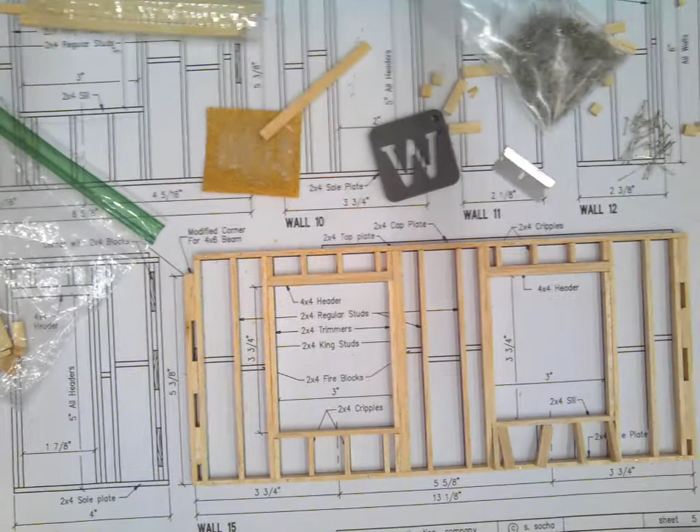All right, welcome back to another exciting build video. We are working on the scale model house project from Midwest Industries. It is really moving right along here. We are on wall 15, sheet 5. Sheet 6 is the last sheet of walls before we start working on the roof itself. This is just really exciting.

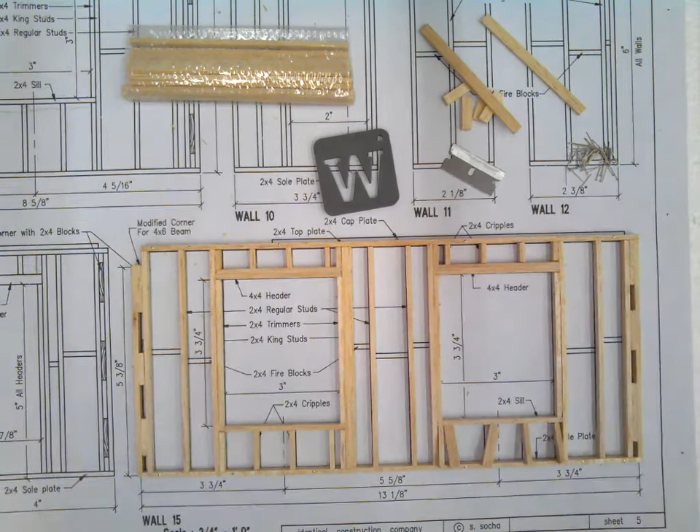So let's see what we can get accomplished today. Now I'm looking down here and it's really... there, that's better. That's getting you more in the sweet spot, center of your screen.

Now this is really interesting how this has come together. We had two identical pieces here. And what I want to say here is this might be wrong. Okay, I'm really looking into this. What I normally have seen is this trimmer go all the way down, and then I'm trying to get some confirmation on that. My friend's working on a build out that has a window, and so I asked for some pictures of the stud structure for the window, so hopefully that will help answer the question. This piece, this trimmer might need to be continuous. So just so we're aware, there are some anomalies in this, but I would say it's over 90% correct of what we would see in real life.

So let's go on to this next part here. We're going to be getting these cripples in underneath the sill. A lot of sanding for us today, but we'll be finished with sheet 5 today. That's the exciting part about this. There we go, that's nice. Get in there.

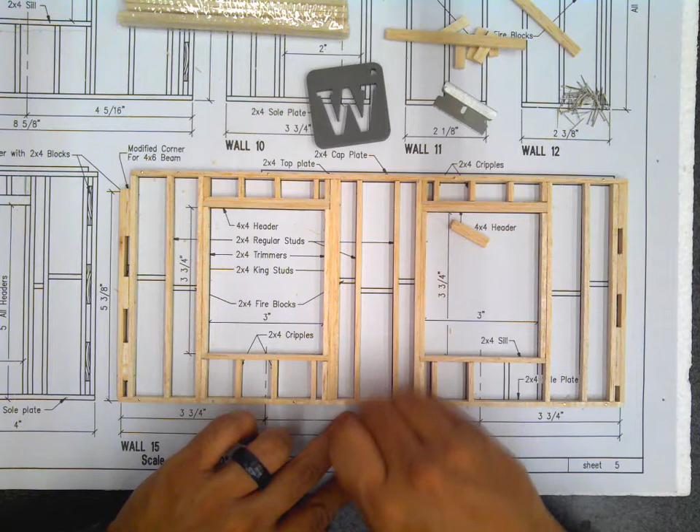Remember, you want it snug, but not too tight. Wow, this is great, okay.

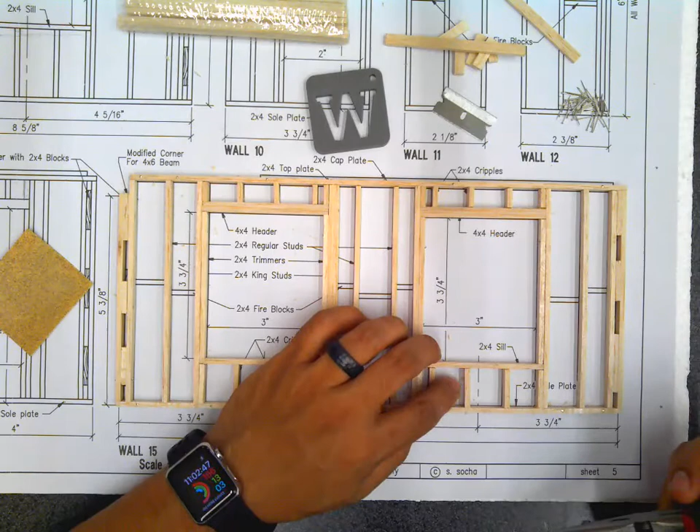Okay, let's get the nails. It is really easy to grab them off of the foam, so maybe I've been doing it wrong the whole time. I'm always trying to improve my process, not because I think it's necessary to do everything as fast as possible. I think it's important to reflect on what you're doing, do things that are intentional in the building process. If you want to get better at your craft, you have to take your time and think about everything in advance.

For instance, I'm thinking about the tiny home project that I mentioned earlier today. The interesting part about that is it could take a few weeks to get everything ready for the space. Just getting the space organized, that takes a while. And I went and had a meeting this morning with the head custodian, so I could try to wrap my mind around what work orders needed to happen so we could get this project started.

Wow, that's great, I'm really happy with that. Okay, so let's see what else we have here. I think we have some top plate, we have a cap plate that's ready to go on. So I'm going to make sure all my nails are in, I'm just going and following up on all of these. Yeah, they're all in now, that's great.

Okay, so this piece is longer than my normal 8-foot stud, so we're going to have to use one of our longer pieces. So let's go to our longer piece bundle. Let's see, will this one work? Yep. This is going to be out of the 10-inch section, that's where you're going to get one of these.

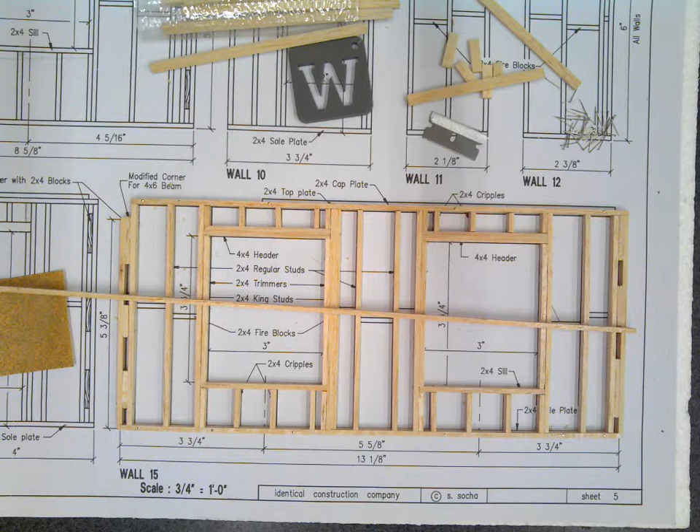Oh, wait, no, that's not right, scratch that. These are too small, these are for something else. Go to this bundle, this is your 18-inch section. Yeah, I thought I had it, I thought I had the right one, but it wasn't the right one, it was too thin. Wait, I'm getting mixed up here, I'm sorry, I'm mixing you up. I'm going to change that again, I'm sorry. But yeah, this works.

Initially, I grabbed the wrong bundle, and I apologize for that. We want the 9.5, we want the 9.5 piece. So that bundle, that's our next move. Sorry about the confusion there.

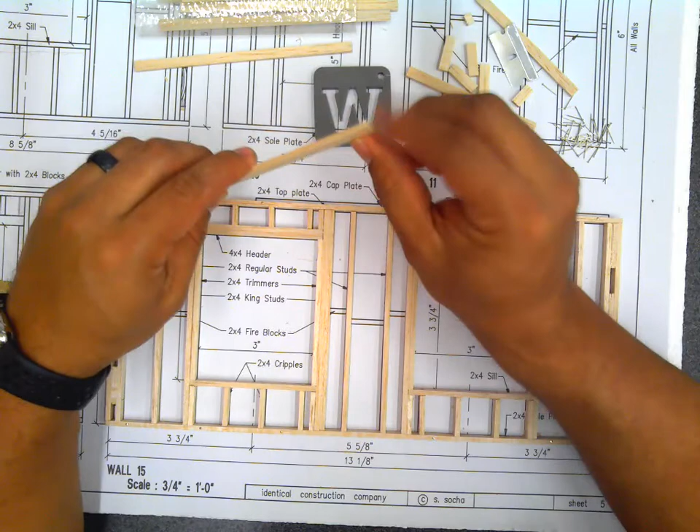This one's a delicate cut. Wow, we're only taking that little bit off. Look how small that is, it's tiny, tiny little bit. I need to sand this a little bit. There we go, let's get some nails in here.

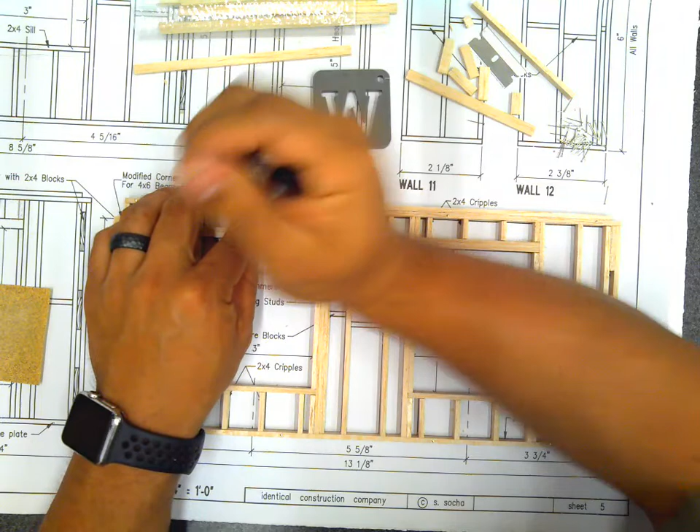Okay, that one's done. I'm looking at channel fire blocks.

That one's close enough. No, that's not close enough. Let's try that there, in that position. That looks nice, I actually like that. And maybe this one's a little longer. And then what about this one? Perfect. Wow, keeping those extra ones out really paid off right there.

Let's see if I have another couple little shorts to go into these positions. What about there? What about that one? Or what about this one? That's perfect, get in there.

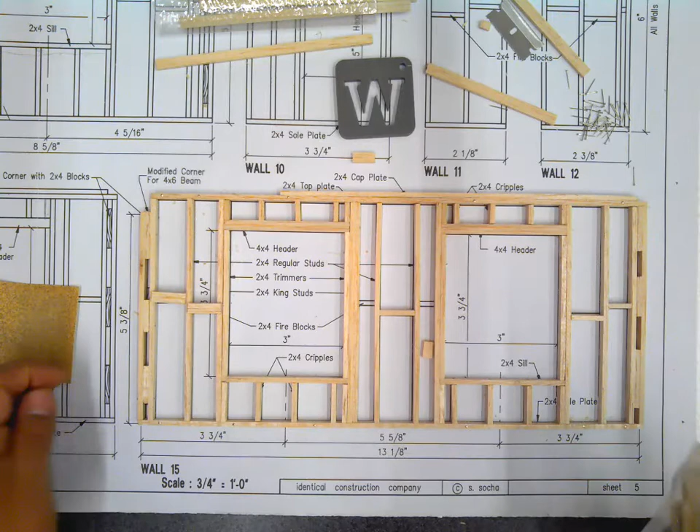I have some shorter stuff than that one. I don't want to take too much time scrutinizing over which one's the best one. That one. And that one.

Okay, that one's good, that one's good. What is this one doing? I can't even grab inside here, it's so small. What's this one doing?

That one's good. This one's good. I'm just carefully aligning it with the drawing. This one, let's see how much we need to sand this. Not too much.

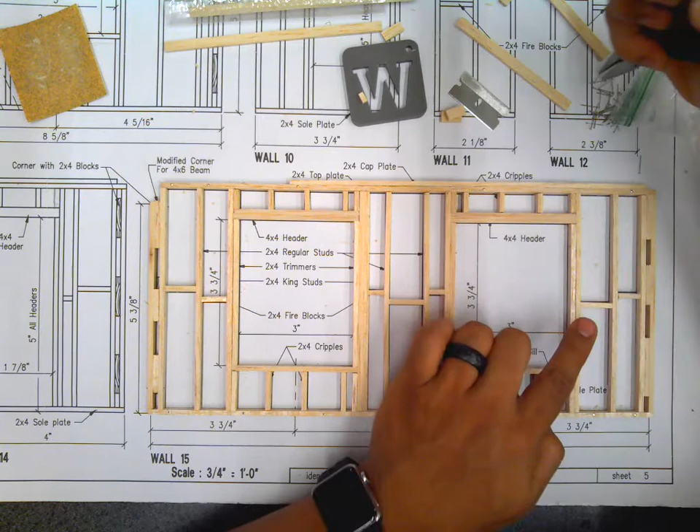One nail from each side. Watch your fingers, pressing down with this finger to provide some back pressure. Now I'm holding down over here, trying to give you a good view of this. I'm holding down here. I'm pushing in. There we go, that's nice.

This one's moving around on me a little bit. There, got it, holding it down with my finger. Get in there.

Nice. You know, I'm really having a lot easier time picking these nails up off the foam than the table, so I highly recommend that change if you haven't been doing that already. It's increasing my productivity, I can feel it.

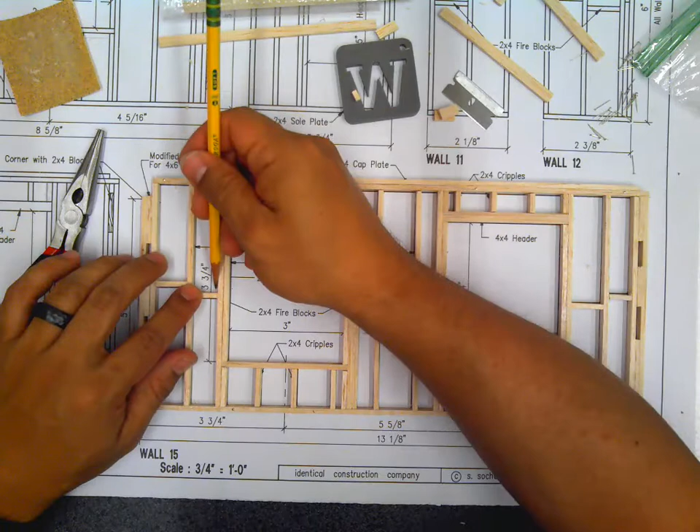Don't rush. Alignment is very important. There's no need to rush and then have to do it twice. If you do it twice, you get more frustrated as the day goes on.

A long work day, if you start off making mistakes, you could want to give up by lunchtime. Sometimes that's an option, sometimes it's not. If you have a deadline coming, if you're having an inspection that took 4 months to schedule, and all of a sudden you're not feeling well but you have a few more things to get done - uh oh, you're gonna have to push through.

Wow, this looks like wall 15 is completed. Very happy with this. Very, very, very happy.

Here we go, I'm gonna start trying to pick it up. Here we go, trying to pick it up. Gently, gently, gently, gently, so gently. Don't crush it.

Top's off. The bottom's off, there we go. Very carefully, without poking yourself, grab your needle nose pliers. Push the nails through, back in the other direction. I find that the sharp point of the nail finds the space in between.

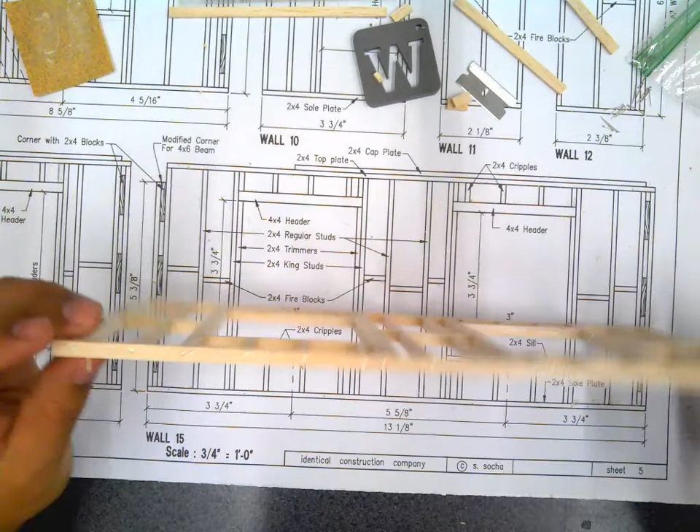I'm missing one, I'm missing one right here at the end. This piece started to twist on me. There we go.

Back to pushing the nails out. The tip of the nail fits right in between the two jaws of the needle nose pliers, so you can easily push it back through without it slipping.

There, that's looking good. That's looking good, and we're to the last one. There we go. Okay, now that we've flipped it over, I'm gonna pull these out.

That was in there really tightly. I'm slowing down now, I flexed this a lot when I pulled out the first nail. So I want to acknowledge, if we break it, we have to redo it. So let's take our time.

Yep, this piece is very dense on the bottom. Almost in, there we go. Great. Came out very nicely.

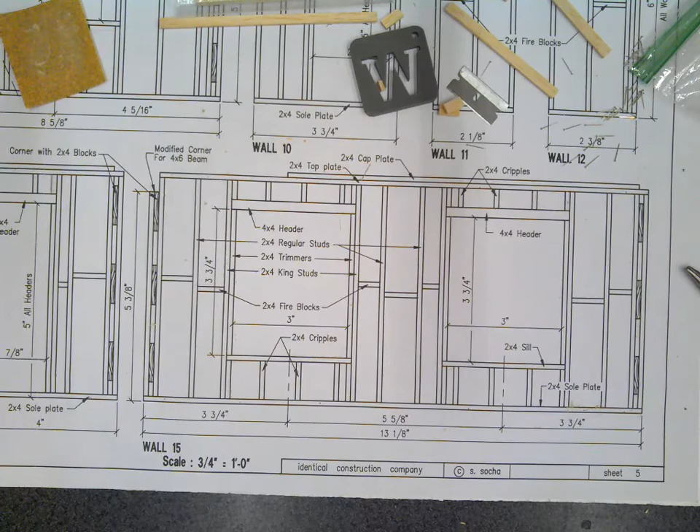Any shorts that are left, put them in your shorts bag. I'm going to clean this up.

Pulling out these nails, making my way around the drawing, pulling the nails out. Only one more. There we go. This is ready to come off the sheet. Wow.

Sheet 6. Nice. All right. This is wow, look how big this wall is. I'm going to have to zoom out. Can you even see the whole thing?

I think this is one where I have to straighten up the camera a little bit higher to fit it all in.

Yep, this is going to be tough to show you, but we always, to get the orientation right, I'm going to put this to the top left corner, the top left corner of my drawing to the top left corner of my foam. Align it nicely. There we go. It's very nicely aligned. I'm very happy with that alignment.

Now I can grab some nails. I'm just going to drop a few onto the paper so that I can do this by hand. I'm putting them in at an angle. It's a pretty aggressive angle, and then I'm wiping to get the slack out of the little bubbles or the little wrinkles out of the drawing. You want this to be as flat as possible. I'm just putting extra this time because this one has some more wrinkles than the last one did.

Let's grab a couple more nails. I'm just getting all sorts of nails in. All right, that's looking good. Let's move this whole camera down. Okay.

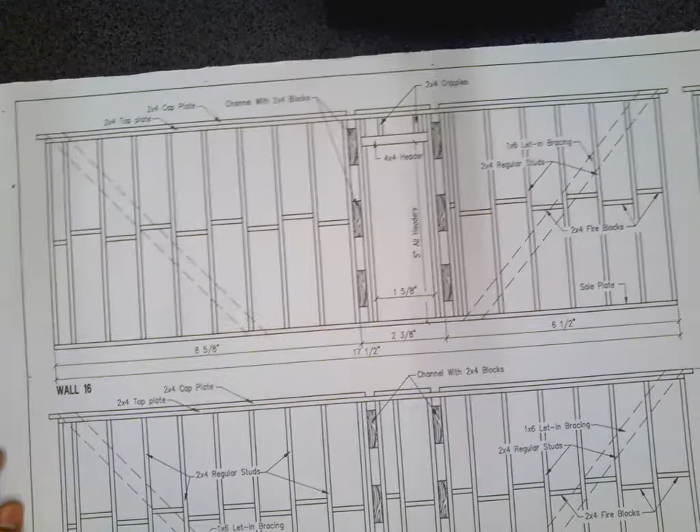What about that? Okay, I think that will work. We have a great view of wall 16. Now this is long. Oh boy. This will take me a few seconds to figure out which the best one for this.

Is that going to be our big ones here? I think so. Yep, we are getting our longest pieces from our bundle. Oh wait, that's not our longest piece. That's our longest piece. So wait a minute, what am I doing? This bundle is...

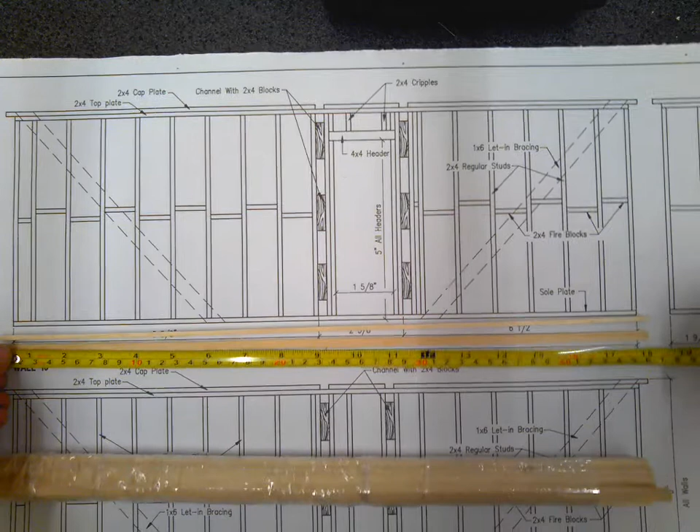Don't want to be confusing. Is that this one? Yeah, that's that one. This bundle is the 18-inch bundle. Double check, 18-inch bundle. So that's this one, the 18-inch.

Once you take out two, put the rest back in your box. We're going to have that for wall 17 as well down here, but let's not worry about that just yet. First things first, wall 16. I said wall 17, but we're not on wall 17 yet. Okay.

Be very careful when you cut these. They're so long. We probably don't have very many extras. So I always cut it a little bit longer than I think I need it to be. And then I just sand it. Sanding these is a little weird because they're so tall.

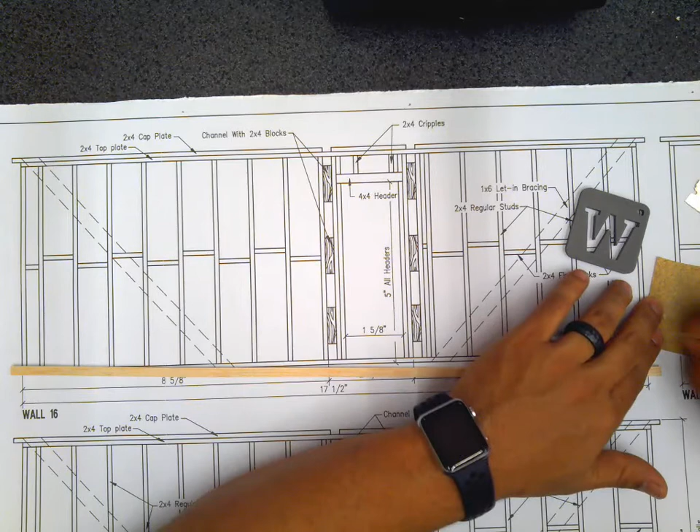That looks great. Let me mark on this other piece from this one. Great, this looks great. Now we're ready for our first two pieces of wall 16.

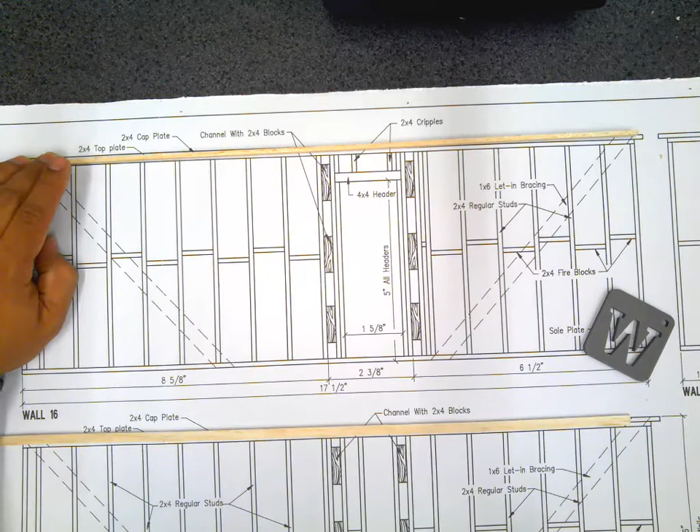I like to get one pretty close to the edge, to the end. That keeps the flex to a minimum. And then I like to follow it along, going this direction to the end. And I like to adjust it to the drawing because there's a slight warping in all of these boards.

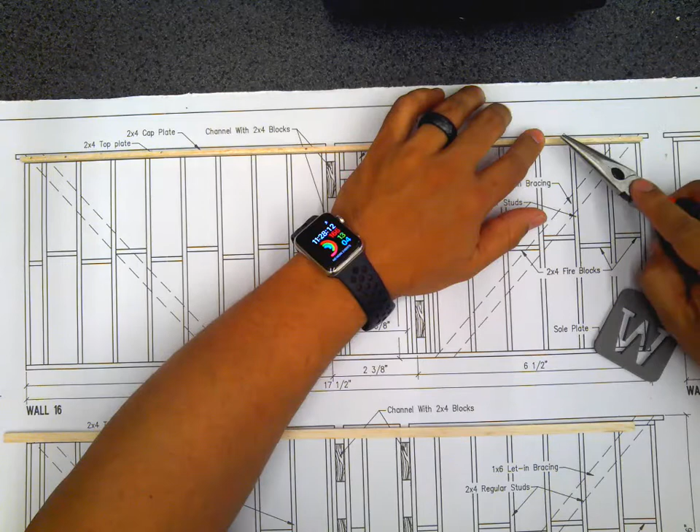Very rarely will you get lumber that's perfectly straight. And if you do, it's probably premium kiln dried lumber, which would not be really what you're using for this. That would be... you get a lot of green stuff, and by green I mean wet. The wood is wet. Wet wood is prone to warping and moving around on you, twisting. So you want to make sure, if you have the option of wet wood or dry wood, you want to get a dry wood. It's more stable and more predictable.

There we go. 1, 2, 3, 4, 5, 6, 7. Now this, because it's so long, I want it to be as straight as possible aligned with the drawing. So I'm not limiting myself to a certain number of nails. I'm using the amount of nails it will take to accomplish what I want, which is perfect alignment, well, near perfect alignment with the bottom graphic on this.

I was doing a lot better with the nails when they were on the paper, so I'm actually going to pick them up off my table and put them on the paper. Nice.

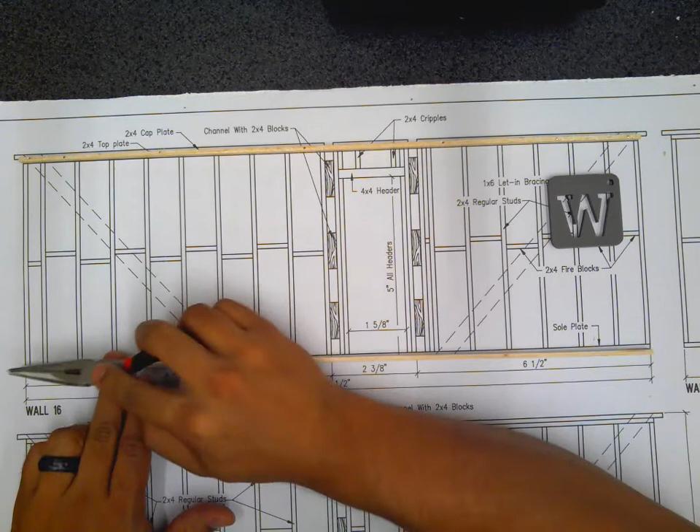Yeah, yippers, we're just going through this, just getting my nails in. Everything's going pretty well. You get in a rhythm. You get in a work rhythm.

This one might have taken more. 1, 2, 3, 4, 5, 6, 7, 8, 9. So yes, it did take more nails.

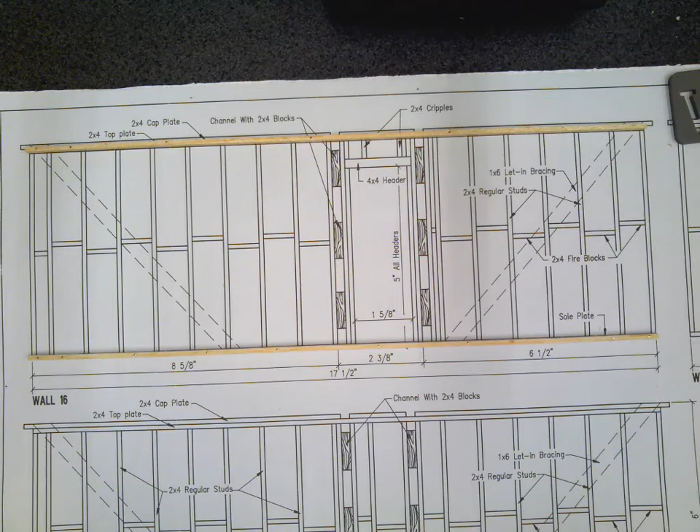And let's see what's happening next. Grab your stud bundle and let's count them out.

This is so weird. There's a 4x4 in the stud bundle. What? Okay.

I need to put this in my bag. So I'm going to put this in my shorts bag, even though it's a full-size piece, so I just know exactly where this last 4x4 is in advance. There is very limited 4x4s and 4x6s, so that's why this caught me by surprise. All right, let's see what we got here.

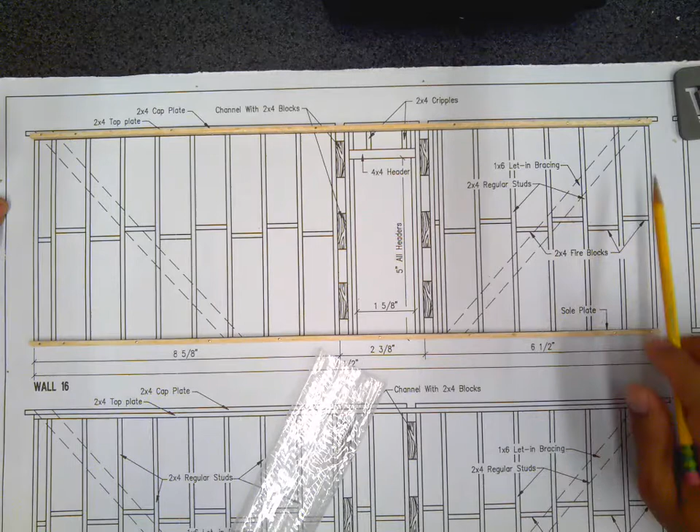We have a lot. Let's count them. These are just the full length studs. 1 through 20. We're going to need 20 for this.

On one hand, it's a lot. On another hand, you're going to see this wall go together really quickly. So let's count them out. 1 through 9. Next bundle.

Last bundle of 8-foot studs. 9, 10, 11, 12, 13, 14, 15, 16, 17, 18, 19, 20.

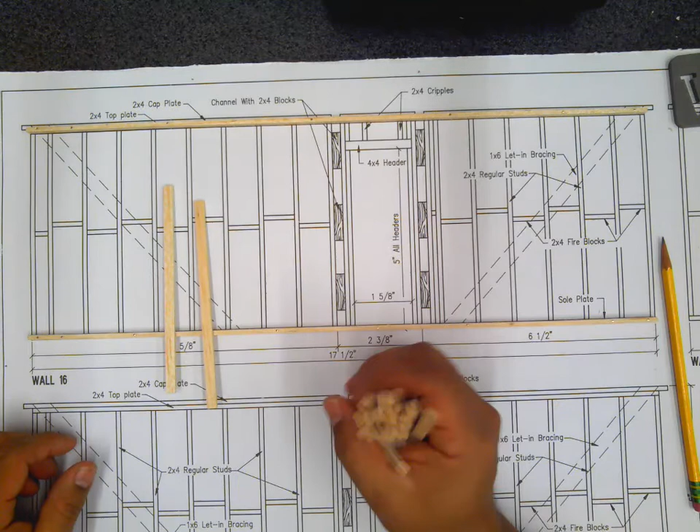All right, we've prepped our pieces so we know we have enough to proceed, but we're only going to need 2 of these initially. So I'm going to just put the rest of these off to the side for now, and then I'm going to focus on what's important, and that's our first piece.

Oh, it just dropped right in there. I have a good feeling about this wall. That's great. Wow. Are you serious? Is this just going to go straight in with no sanding? That would be amazing. It would also speed up our process a lot.

Just because we're speeding up doesn't mean that we need to hurry. It just means our timetable is moved up. Let's get some nails in.

Carefully make sure you're aligned with the drawing and follow through, placing your nail in, placing downward pressure with my fingers. There we go. Awesome.

Next, my alignment is great. Watch your finger as you're pushing towards your finger. And there we go. Follow through. Great. And those are our first 4 pieces.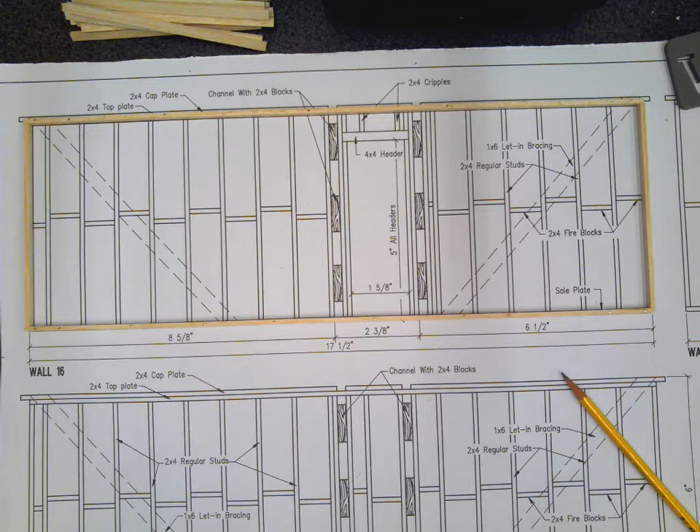They are always our first 4 pieces for any of the wall sections that we do. First, we do the perimeter.

Okay, so let's see how these other ones go in. I'm hopeful this could just really jam for us. What? You have got to be kidding me. It's just one after another, just going right in perfectly.

There's a slight variation in the length of these studs, and the variation is like less than a 32nd, might be like a 64th. So it's really hard to say if you're going to have to just barely rub them with the sandpaper to get them to have that nice little snug aspect to them. But these are just dropping right in.

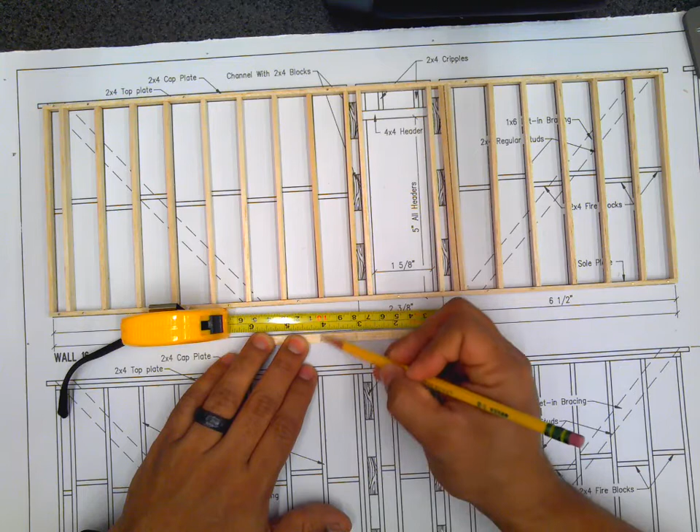Okay, that's going to get me 5. I need 1 more. 1, 2, 3, 4, 5.

This is faster because these are kind of sandwiched in. They're not the same as the other problems we were having with the other ones where we need to sand all the time. Let's get rid of this tape measure.

I have my spacers, my channel blocks, and these represent where the other walls align. The other walls are going to be coming straight out from there.

Okay. Wow, wowie, wow, wow. Let's get some more nails.

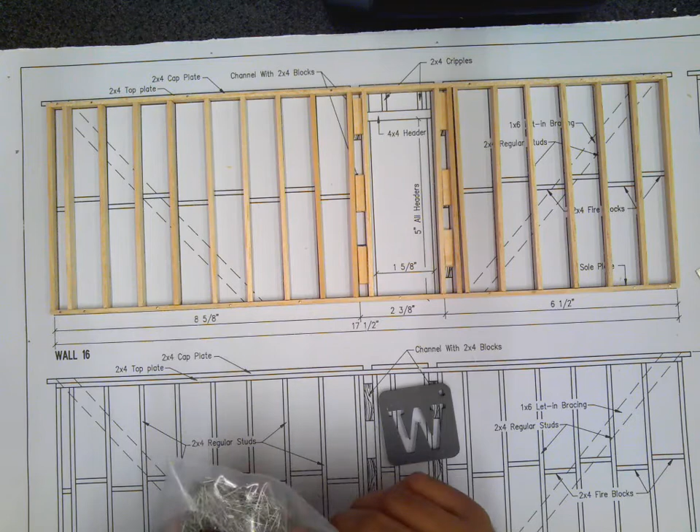I'm running low on nails, so I'm going to take some more out, and I'm going to keep them on the top of the piece of paper. It seems like that's really a good upgrade from my hard surface that I've been picking them off of. The foam has a little more give, so it lets me press into the paper just ever so slightly and grab the nail just a little bit deeper into the jaws of the pliers.

Watch your alignment, follow through. Let's talk about this in an overview sense. We're going to do nail up, nail up. The nails are following the direction of the pencil. Up, up, up, up, up, up, up, up, up.

Watch this. Make sure you put your spacer in here so that you can maintain the right width of this gap. Up, up, up, up, up, up, up, up, up.

From the top, down, down, down, down, down, down, down, down, down, down, down, down, down, down, down, down, down, down. Okay, that's where we're going. Let's do this.

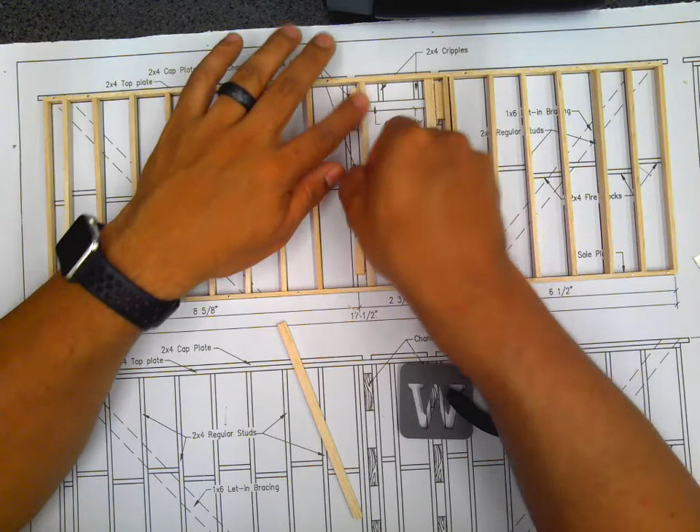That ended up scooting it over, not enough. So I made a mistake here. I want you to not make the same mistake. So what I'm doing, if I can pull this out—yeah, I got it—is I want you to start with this side of the door. Once I get this one in, it will make more sense what I'm asking you to do.

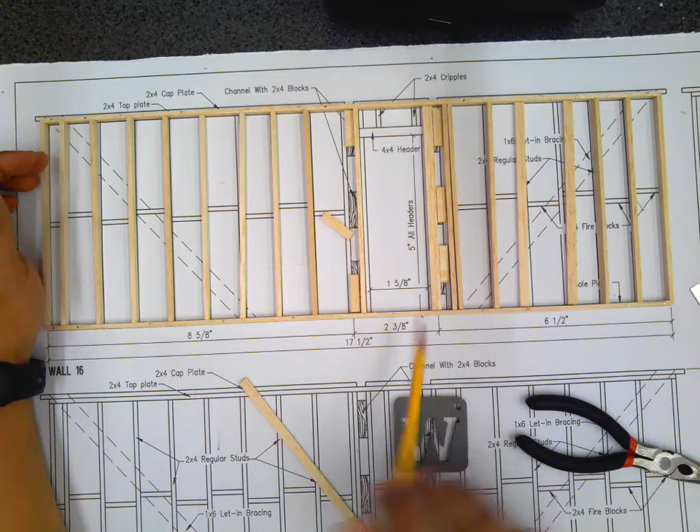Continuing on, we have some of these channel blocks to put in. We're working from this side, moving this direction. And when we do this side, we're going to start with this stud and work this direction.

I also see a ton of studs in the way here, so I'll probably just move a few of these out of the way for now so I can get at this at the angle. That will improve my ability to interact with this section.

So here we go, just getting these pieces in. Okay, I'm nicely aligned right here with the drawing, and here's where my trimmer will go. These pieces are keeping the gap. Let's get some nails in.

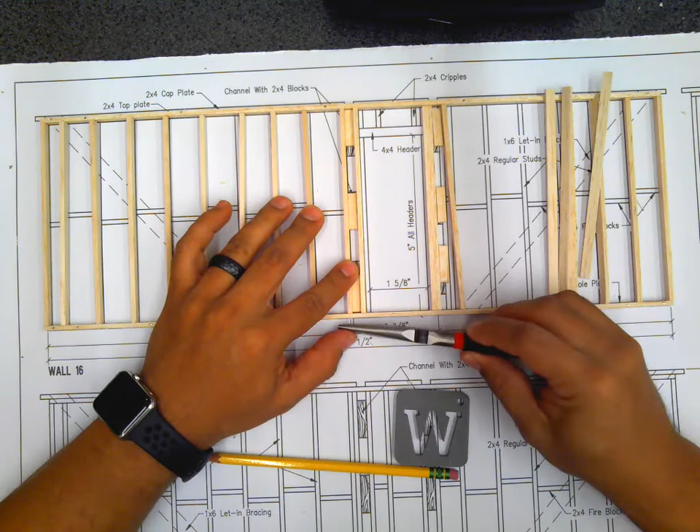Okay, now that's nice. Starting here with this one, and I'm going to start from the bottom.

Yes, John, question? I got a notification that somebody raised their hand, John. John, do you... Okay, I'm going to just go ahead and lower that then. But if you do have a question, just let me know. All right.

The alignment of these is so important. Just take your time.

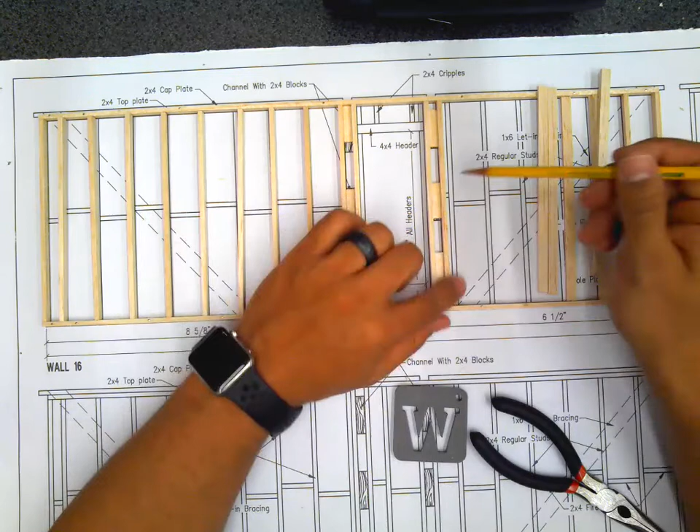Making this, keeping the door the right size, means that I've pushed out a little bit, so that means I'm almost running into this area a little bit. But that's okay, that's all right.

So let's go ahead and get these nails in. One from the bottom, and one from the top. Now I'm going to do the sides—nail these from the sides. And it's important we get these now.

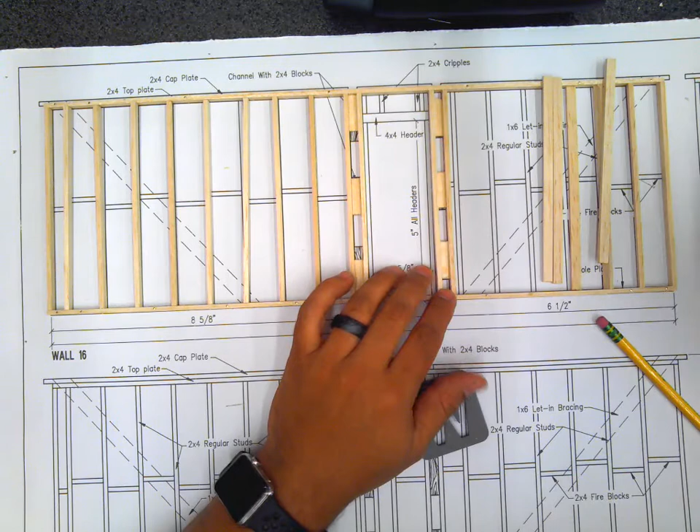I'm going to put 2, 1, 2, 3, 4, 5, 6. Then I'm going to go 7, 8, 9, 10, 11, 12. And then I'm going to continue with the stud structure going across. But for now, we're getting these in. Make sure you put them in horizontally—you don't want to nail your model to the paper.

That came out just a little bit at the end, but it came out in the up direction, so I'm just going to go with that. Okay.

This needs to be up there, and move this down just a little bit. There we go.

So I'm trying not to block your view, but it's also kind of hard to do, to go in from this side. Oh, I should just go in from the other side. This is a right-handed versus left-handed issue with me and the camera, blocking the camera.

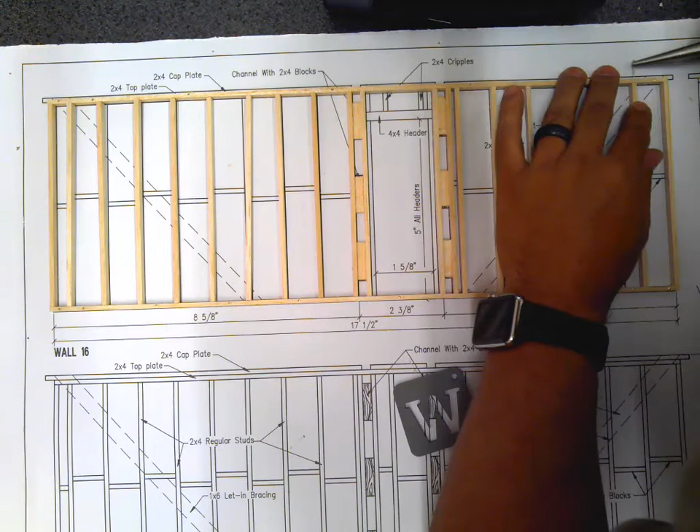My alignment was a little off there, so remember, this is not a race. Take your time.

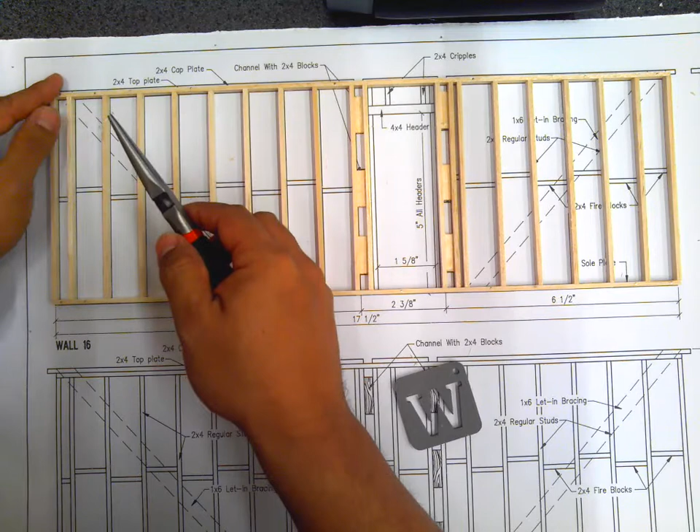There we go. Wow, that was quite quick. We got all of those in. I'm not happy with this alignment here. I'm just going to pull that out with my pliers.

Stud structure is important to maintain the alignment, 16 inches on center as you're working across. This is a really big issue if you don't space these correctly, and then you expect the sheetrock or shear wall to go on, you're going to be adding more studs, or you're going to have to be doing all this makeup work to make whatever happens that you want to happen. It's better to take the initial time and do it right the first time.

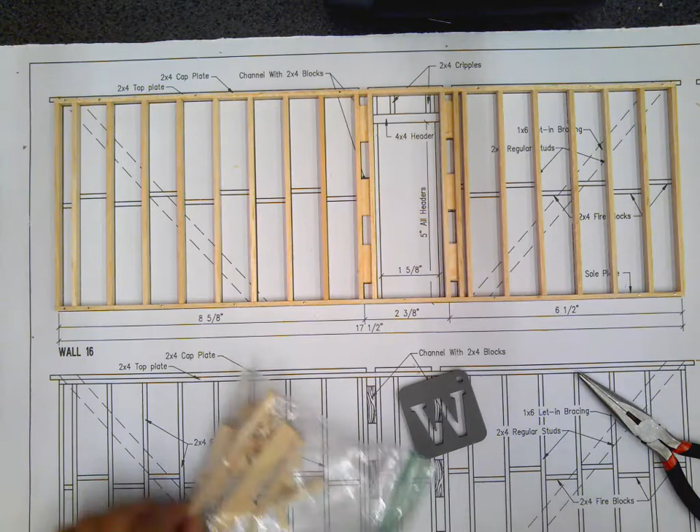Once we have all of those in, what I like to go to next is this header. So let's see what I have here as far as the headers go. We're looking for a 4x4 piece. No, nope on that. Let's find my 4x4. And here's a 4x4. That's nice.

I thought I had another piece out, but it must have just been my imagination. They all do look the same. The uniformity of it is difficult, makes it hard to distinguish between the two nearly identical pieces.

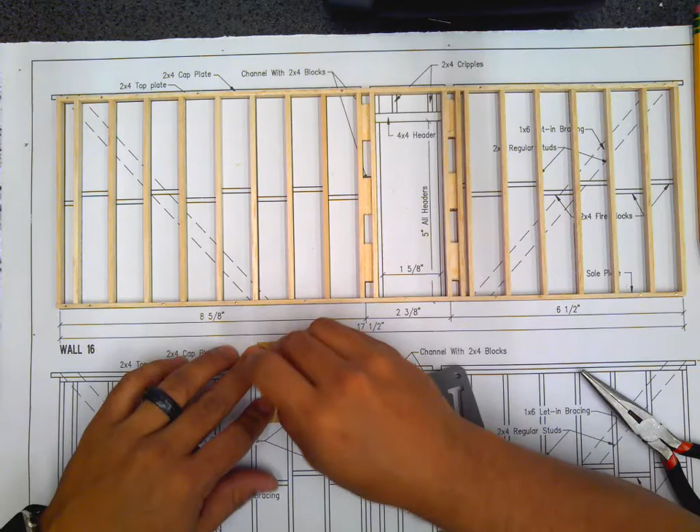Let's get some nails in this from the side. There we go.

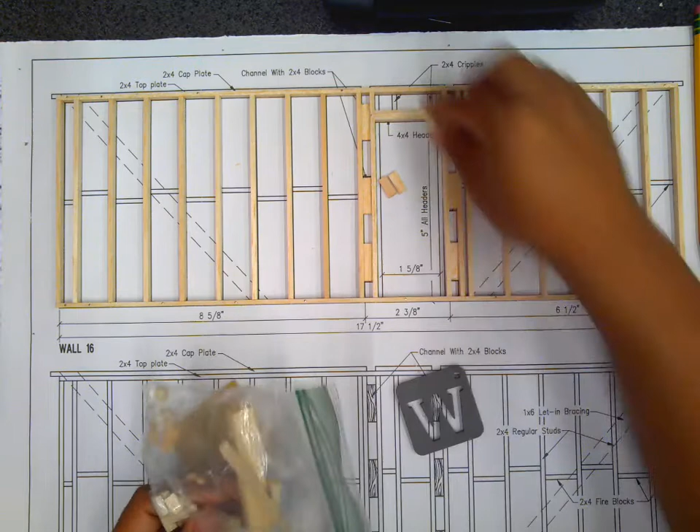Any guesses on what's next? That's right, the cripples. Those two look about the right size. Let's see if I have another. I have a lot of shorts in my bag, so I'm just trying to use all those up. That's a little bit bigger than I need. How about this one? That's jumping right in there.

What about this one? It's a little loose. If I have something that's a little loose but close to the right size, I just put it in this corner, since it gets some support from the rest of it. Now that's a little loose. This one's close enough, though it looks a little sloppy.

Yeah, I know I'm the only one who's gonna see it, but I still want it done to the best of my abilities. When you take pride in your work, you're gonna be wrestling around with those ideas sometimes.

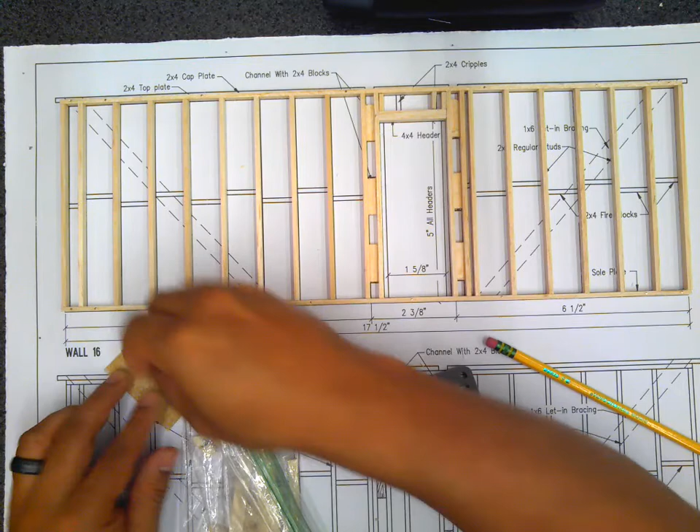Well, how good is good enough? In our profession, we build to the code and to the design that's specified to us, and to not do that is not recommended, because we have safety issues to think about, and how people can be safe, how they can live in their homes safely. To skip steps is not ethical. People are depending on us to do a good job.

This is a little too tight. I'm gonna just give it just a little bit more. There we go. Nice. And this one's a little loose. Yeah, it's a little too loose. Switch that out. Switcheroo.

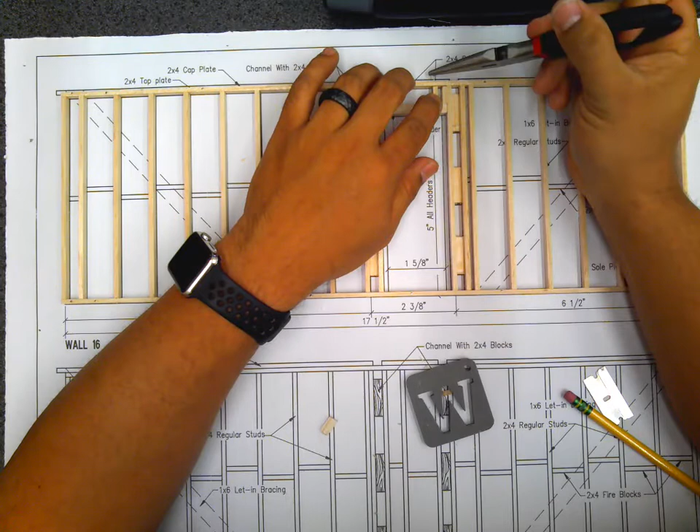Let's get these nails in. There we go, that's nice. Let's get these trimmers in. What do we have here? Too short. Grab 2 new studs. Boom. Boom. 2 more from your 8-foot. Looking good.

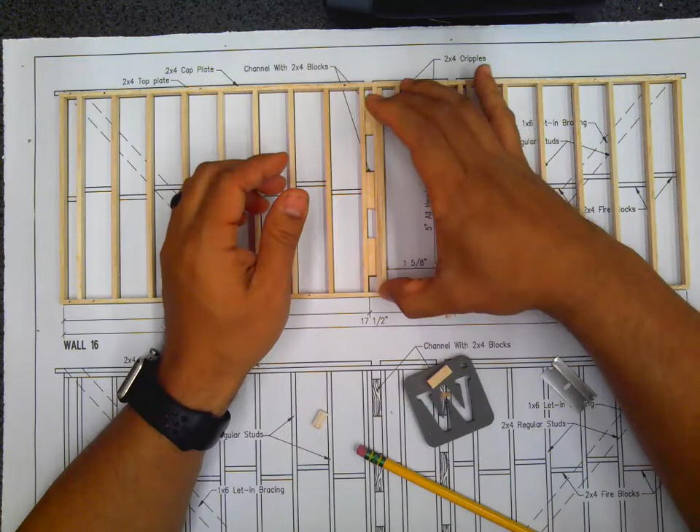Just a little on. Nope. There we go. Now that that one's the right length, I'm going to place it up against the other one, hold it, mark it, put the original one back in its spot, and cut the second one to identical length.

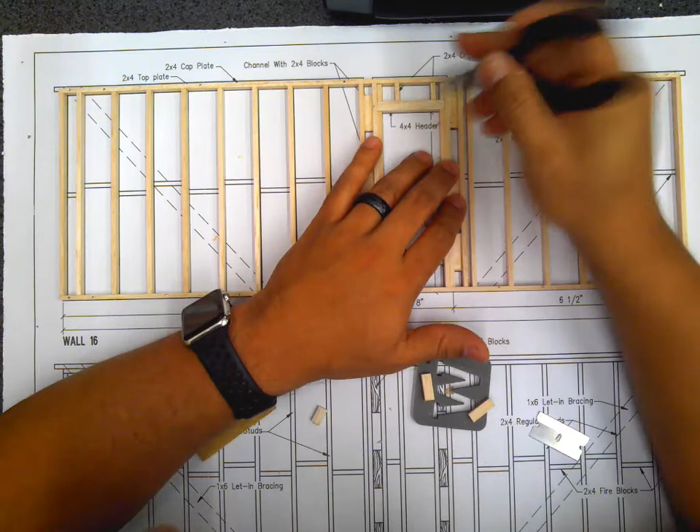Let's get it in there. Nice. Let's get these nails in, first from the bottom. And second, I like to do a little angle here, at this angle. It's a very steep angle, and I just put this one in like that. We're trying to hide it so that there's no protruding points of the nails that we can hurt ourselves on. There we go.

This door is all framed out. Cripples are in. We are moving on to the fire blocks and the top. There's so many, I think we're going to be able to cut a lot of these at once. So that's what I want to focus on next, is how can I cut all these? I'm just trying to get out my shorts a little bit.

Let's see if I have a couple of these little short ones to fill up here. What about that one? That's close enough. Or is this one just the right size? Oh yeah, that one's the right size. That one I just needs a little sanding. And then there's a microscopic one here, so tiny I'll leave that till the very end.

And then everything else looks like the same width. So let's just create one and see how that goes, and see if I can put that one into multiple spots. Let's just choose this one for grins. It doesn't need to matter which one you choose when you're trying to determine this.

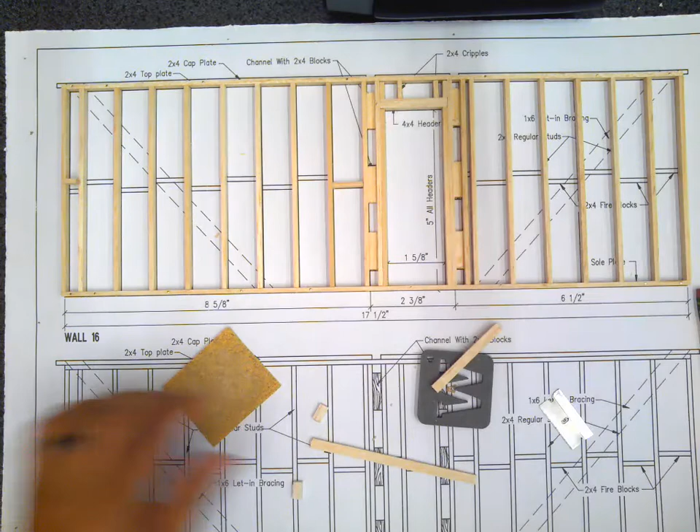That looks great. What about this one? That looks great too. This is going to go really quickly.

Okay, so how many do I need? 1, 2, 3, 4, 5, 6, 7, 8, 9, 10, 11, 12, 13 - and this one on the end I think is a little short. Yeah, 13. I just need 13, so I need 12 more.

And just start with these pieces and work my way through them.

Mark. Mark. Mark. Hold it flush, mark. Hold it flush, mark. Flush, mark. Flush, mark. Flush, mark.

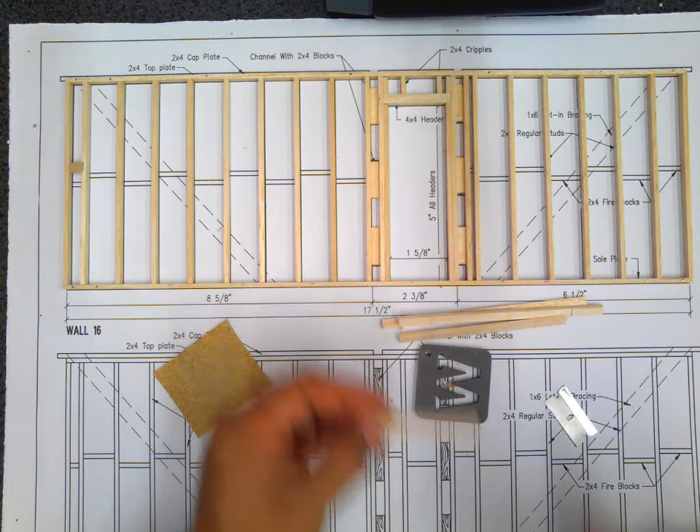Okay, so let's see how many we get out of here. That's a good one. That's a good one, short. That's a good one. And that's a good one. That's a good one. And that's a good one. Great.

Okay, so we have 2, 4, 6, 8, 9, 10, 11, 12.

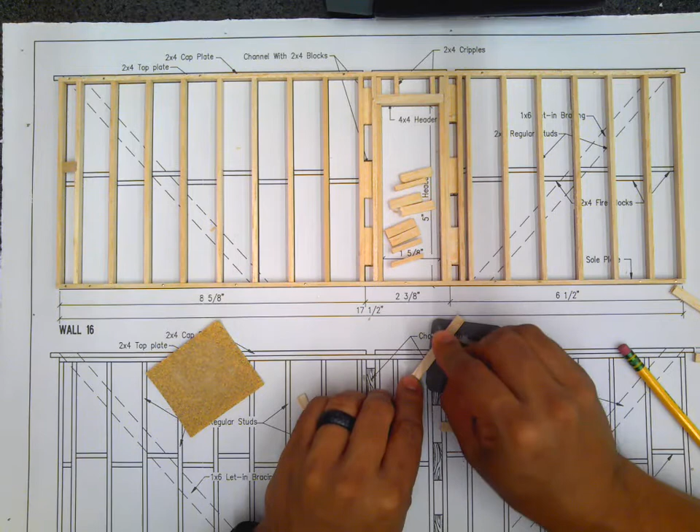We are moving. Okay, so let's see about getting these pieces in. Gently sand them, gently sand them. You don't want to sand these too hard. These are almost the right length already.

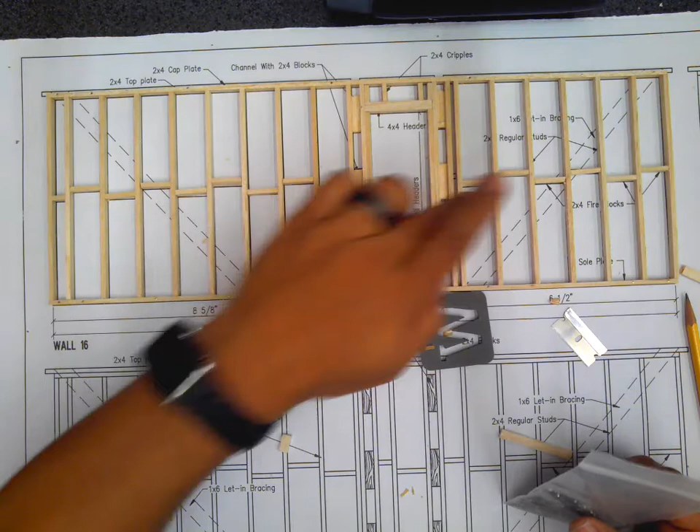Okay, now it's time to take out a lot more nails. We need 2 nails for each one of these. 1, 2, 3, 4, 5, 6. This is going to be a bigger amount of nails than I usually pull out of the bag.

Okay, here we go. When they're spread out a little bit, I find them a lot easier to pick up.

Remember to put some pressure down on your model when you're putting these in, and watch for your finger because you're putting the nails in the direction of your finger, and that means there's a higher chance of an accident. Now, that doesn't mean it's going to happen, but we just need to be realistic if we're putting our hand within the distance the nail could reach.

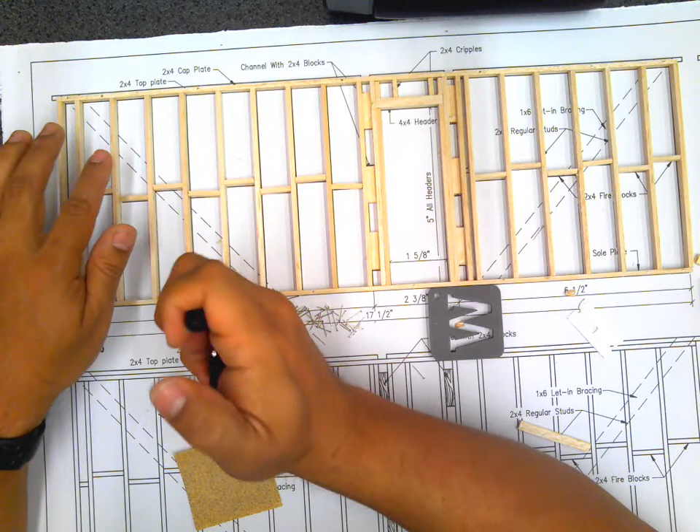And we just keep on going. That came out. Since this is hard to see with the camera, I'm going to get in a little closer.

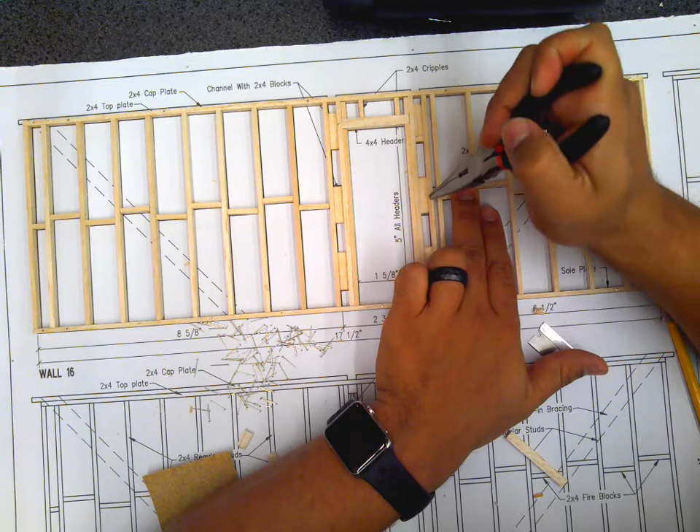Nice, halfway done. Boy, that is really, really going nicely. Wow, that went really nicely.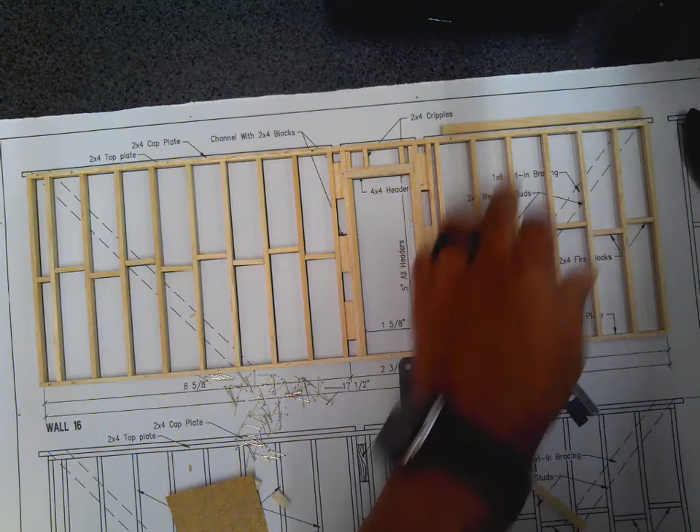Let's see what we need on top here. We need a few cap plates, and we are done with wall 16. Let's see what we can get away with here. Nope, not for that one. What about this one? Nope, just a little too short.

That piece up there. And let's see, those are like the mediums - they're not quite too long, but they're not too short either. Let's see what we got here. Is this one long enough? Yep.

You need two pieces from the 8.5 inch, well, 8 and 5/8 inch bundle.

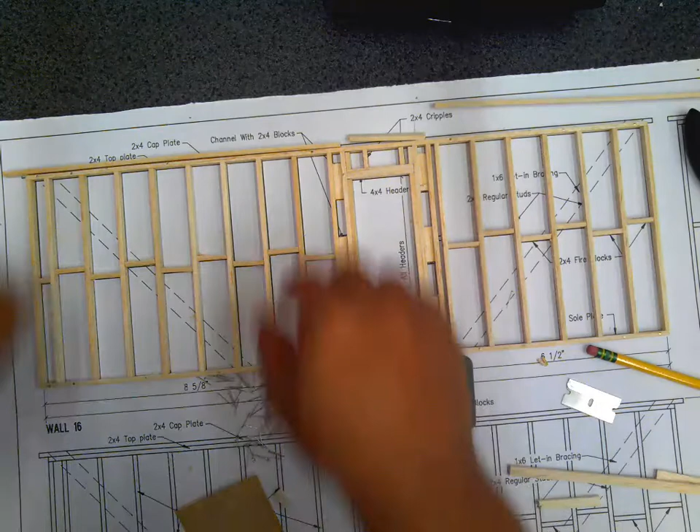This seems like it's going to impact both sides, so I'm going to give it a little bit of sanding. Right there, I'm going to get this one nailed in first because it has influence on the things that are around it. And I'm going to be using the spacers also.

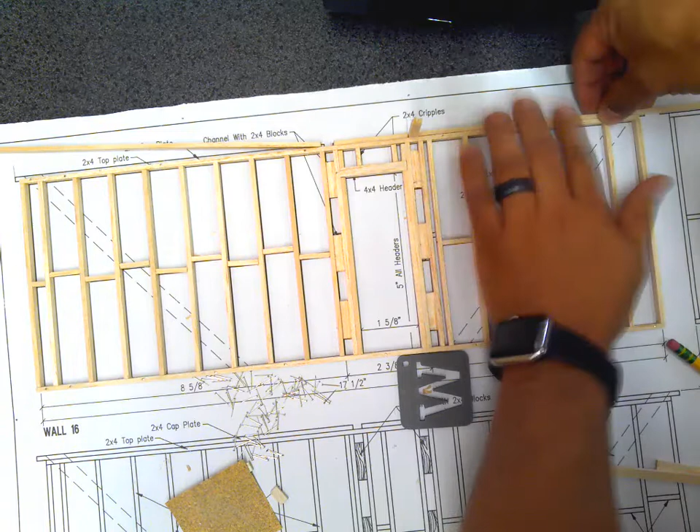Okay, here is a spacer for this wall. There, that looks great. That's the line.

It's just a little sanding. There we go, get your nail. Got it. Last piece of wall 16.

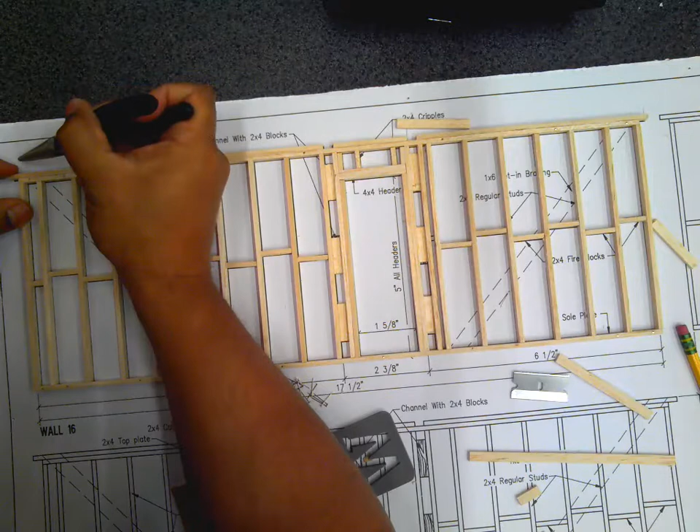Nice. This is great. Wall 16 completed. Wow.